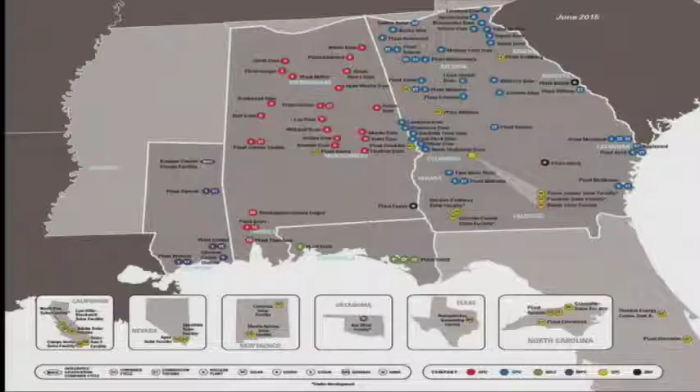We've been talking a lot about the Clean Power Plan, but the primary driver for why we're switching those units was MATS. With MATS, natural gas inherently lowers the emissions of the pollutants that MATS was targeting. So natural gas units are exempt. And there's one caveat that allows you to keep coal as a backup. That's important for reliability, in case natural gas has some sort of supply issues. We do have at one of our plants the capability of having coal as a backup on a very limited basis.

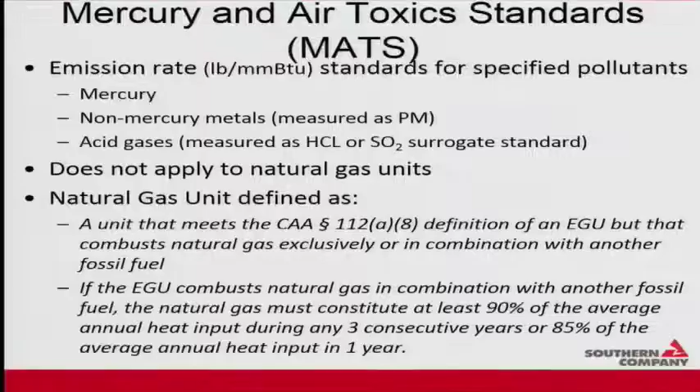So here are the 3 plants that we're converting. It covers 8 units and approximately 2,200 megawatts. The units are fairly medium to small, all over 40 years old, but design-wise they've got some fairly different designs. At Gaston, we have 4 B&W wall-fired units, and that's the plant that's going to maintain the coal backup. The selection for the coal backup really depends on if you have other units at that plant that are going to be using coal, so it makes sense that you already have coal there as a backup. At the other 2 plants, there won't be any other coal units, so keeping coal didn't necessarily make sense.

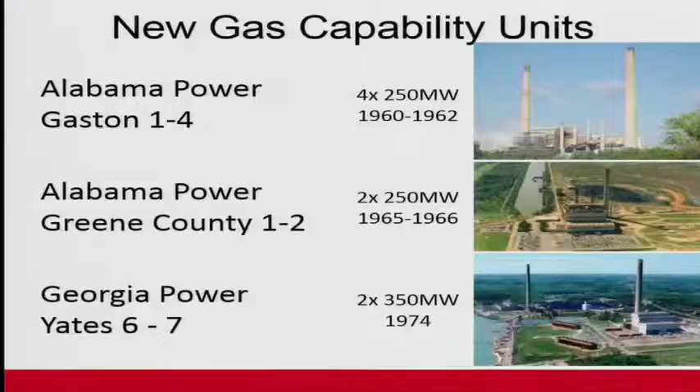At our Greene County facility, we have 1 B&W unit and 1 Riley Power unit, so we've got 2 fairly different units there to try to design to. And our Plant Yates at Georgia Power has 2 Combustion Engineering tangential-fired units, which makes them different. In addition to the current projects, we already had some units that were firing natural gas, and due to MATS, they actually had the coal capability removed. That covers 4 units.

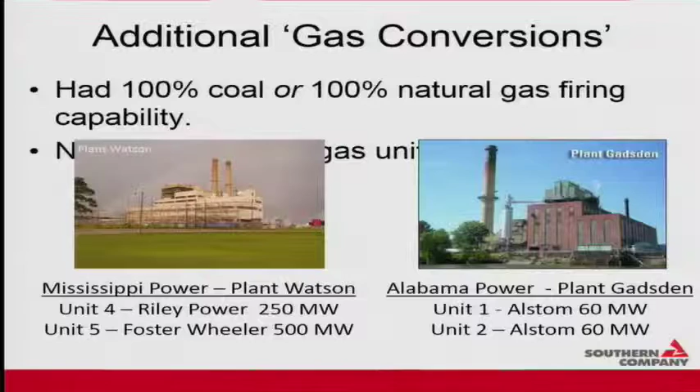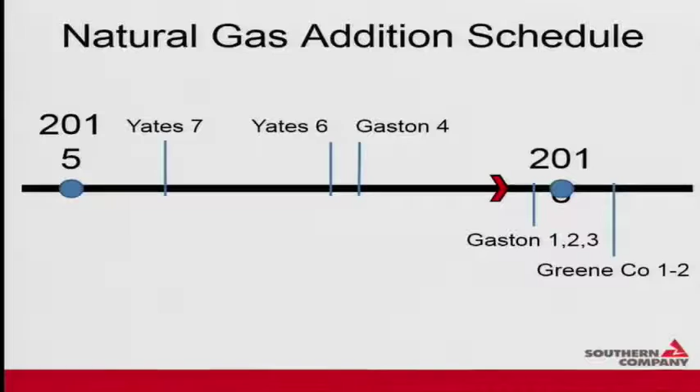So our schedule here, we're about halfway through our gas additions. We're currently working 6 of the 8 units, and we requested and were granted the 1-year extension. So we're looking at the April 2016 deadline to get all those finished. Whoops, jumping ahead.

It also takes a gas pipeline. At two of the plants we already had gas supplied to the plant, but one of them didn't, so we had a 32-mile pipeline we had to build. And when you start having to add pipelines, it starts increasing cost and starts making things less economic. It takes a lot of work to rework your gas yard, your gas conditioning facility, to make sure your regulators are in proper use.

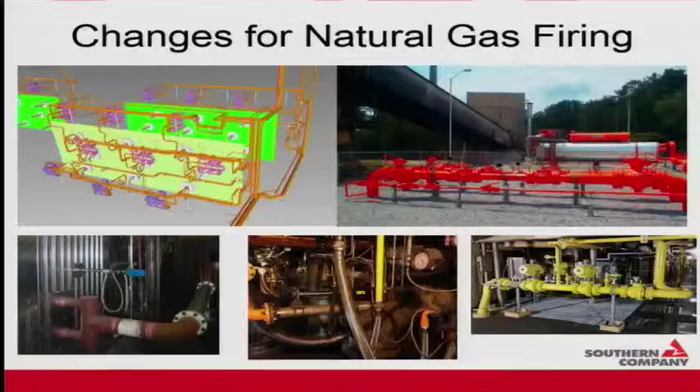All right, so for our plants that retain coal, we basically still have the same coal burner that we had before, but we've added gas to it now. There are a couple of different designs that do this, and this is the one that we selected for our plant. It adds gas down the middle, so the green section there shows where we're adding gas to the existing coal pipe, which is in the gray.

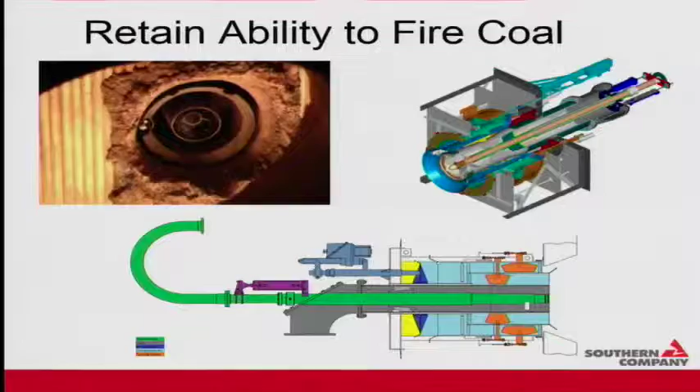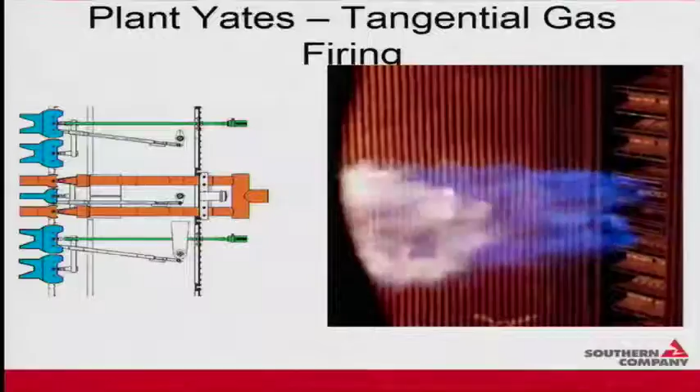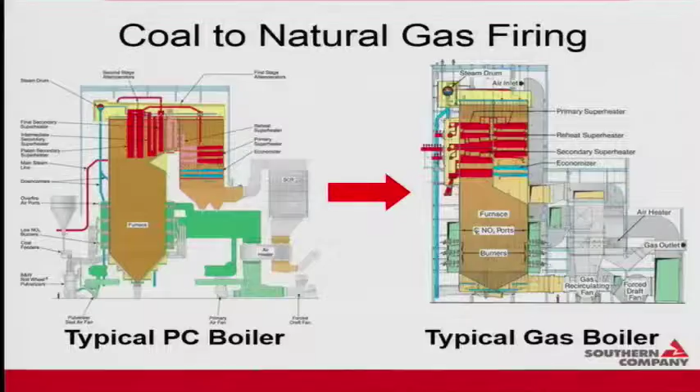But I guess going into it, that was expected. We've gone through, and one of the key things to do when converting one of these boilers is to commission a design study to see the impacts of firing natural gas and just to see what changes will be needed before you actually get there.

So we actually had a forecast of low steam temperatures, and then we actually did have a little bit low. Boiler efficiency also drops off, but that's just inherently due to the fuel switch. Natural gas will be less efficient with your boiler. And so that tends to be in about the 3 to 4% range on those.

One of the things I didn't really anticipate till we actually got into it was you actually save a little bit on station service. So you're going to lose a little bit on boiler efficiency. That's going to hurt your gross number, but you get a little bit of it back in your net number with some station service by just not having to run your mills, your crushers, your conveyors, your ash handling systems.

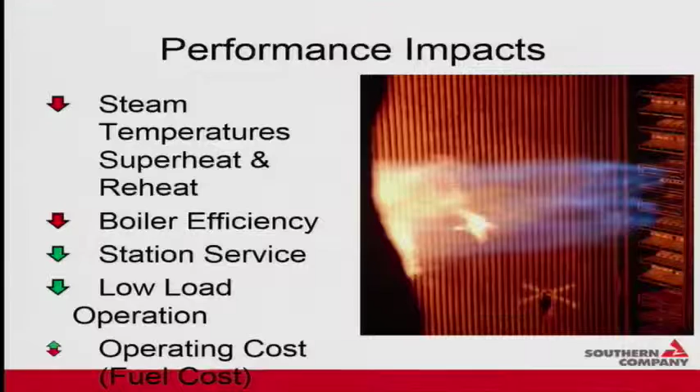And it also helps a lot on emissions. This conversion was there primarily for MATS to eliminate mercury, SO2, heavy metals. And it does a good job on that because inherently the fuel doesn't contain those. But some of the other emissions benefits are a lower NOx. We saw a drop of about 60% NOx. And then the CO actually dropped 80+% in some cases.

And so there's a balancing act there with the NOx and the CO, where you can stage and control flame temperature, so you can balance those a little bit. And then on the CO2, just inherently with the lower carbon content, we saw mid-30s% reductions.

And so you heard a lot earlier, I guess, 50% or half reductions with natural gas, but that was due more towards combined cycles, where you get the lower carbon content and you get an increase in efficiency. Whereas with these boilers, you're just relying on carbon content.

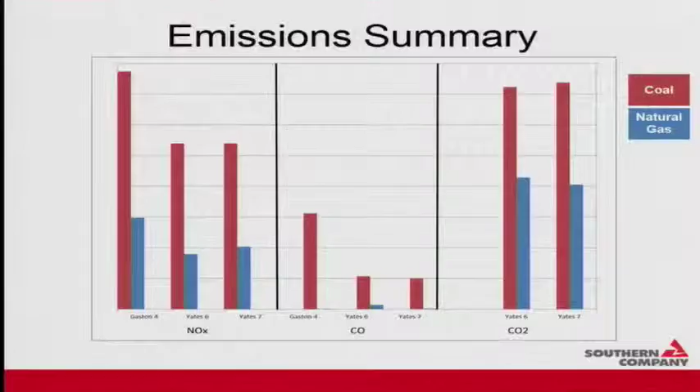So I guess I went through those pretty quick there, but in the end, that fits into our strategy of clean, reliable, safe, and affordable power.

So I guess, anybody have any questions?